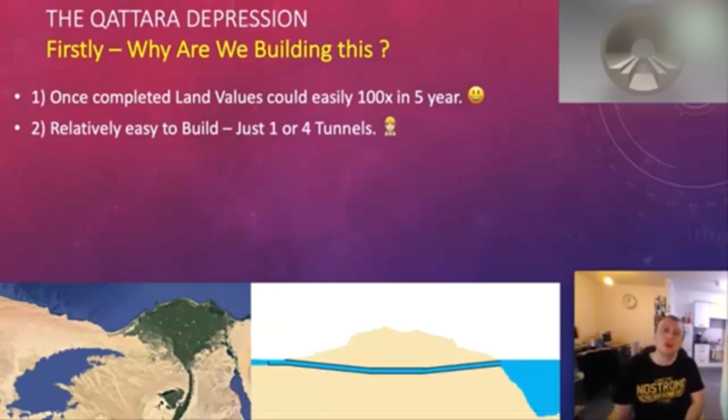Now, it'll be relatively easy to build this particular project. Like I say again, it can be done with 1 tunnel. If you do 1 tunnel, you wouldn't flood the entire area. There wouldn't be enough water volume coming through that tunnel. However, you could add subsequent tunnels at a later date, thus increasing the water level. You probably need maybe 2, maybe 3 tunnels, maybe 4 tunnels just to be safe. It's up to you how much you want to spend. It is highly probable, and I mean very, very highly probable, the Egyptian government would fund the entire project.

They've just spent an absolute shit ton of money on the Suez Canal. Why would they not spend a relatively small, affordable amount of money on this project if it increases the GDP of their country? They definitely get $10 back for every dollar they invest in this scheme, easily. It's very close to Europe, thus a potential tourist attraction.

Now, I've mentioned the Palm in Dubai. This could be a really excellent smart town or smart city. It could be a place where people could holiday. You could have hotels here, restaurants, bars. You could sell the property here to high net worth individuals. You could sell thousands and thousands of acres for development. It is an endless opportunity.

All you need to do is use your imagination, guys, and this is the perfect place to do it on this channel. So it will literally put Egypt on the map. The map of the world will change because this is such a huge area, 7,500 square miles of pristine lake, which could be used for a hell of a lot of different things, and that in turn will boost the local economy by a good few percentage points in the next couple of years.

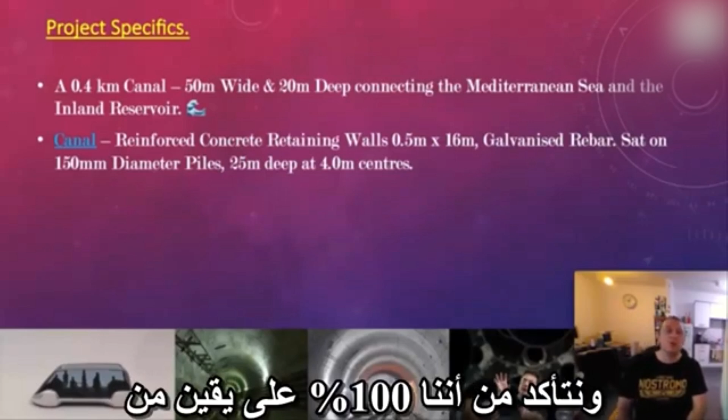The actual retaining wall will be sat on 150 millimeter diameter bored piles. They'll be steel piles, 25 meters deep at 4-meter centers. That is to ensure that this wall stays in place for the next 150 years and does not topple over if we do at some point need to widen the canal. Obviously there may be some extra works required if they do require widening the canal, but I don't think so. But just to be safe, let's put it in there and make sure we are 100% sure this is going to stand the test of time.

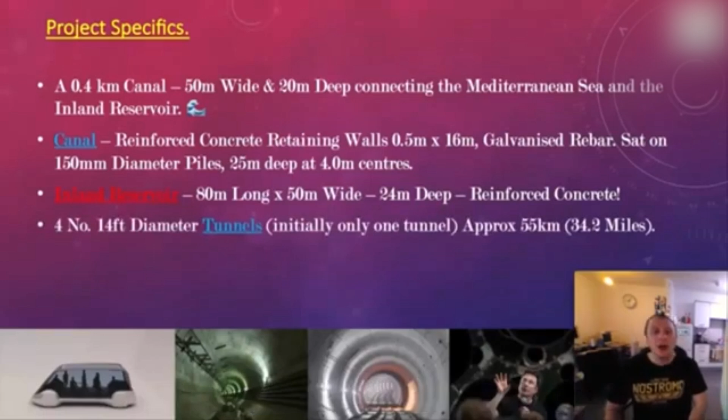So the inland reservoir will be 80 meters long by 50 meters wide by 24 meters deep. So it's very, very big, a lot bigger than an Olympic sized swimming pool. Again, reinforced concrete, galvanized steel rebar. This reservoir will be linked to 4 typical tunnels from the Boring Company, 14-foot diameter tunnels. Initially just the one. They will be approximately 55 kilometers long, or 34.2 miles.

In between the actual canal and the reservoir, we'll have 6 sluice gates. That ensures that we can undertake any maintenance we need to do on the tunnels or on the reservoir. Thus, we need sluice gates to control the flow of water.

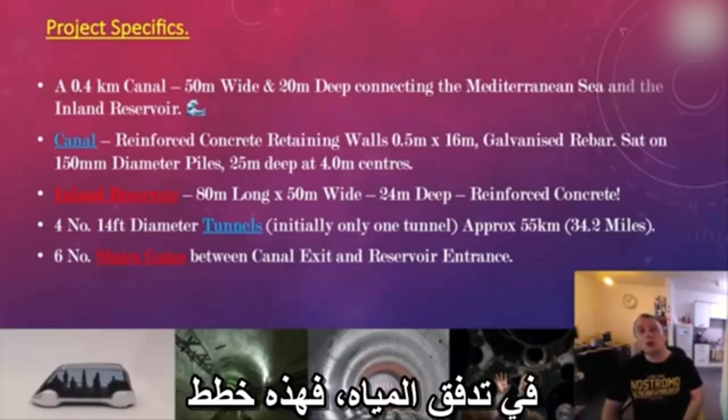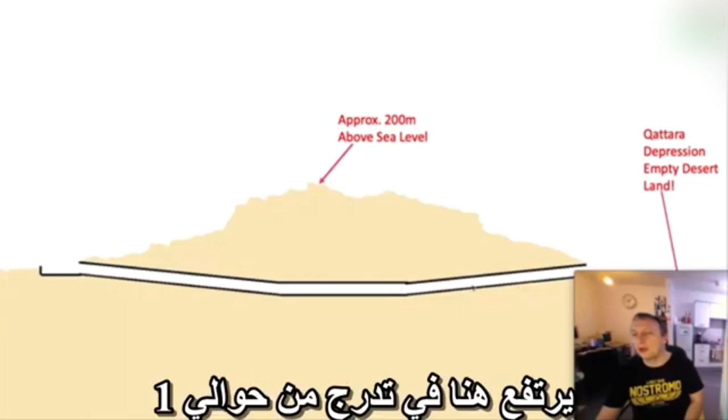Here's a diagram that I produced in advance. You can't actually see the depression, unfortunately, because my mug is in the way, but as you can see, we have our inland reservoir here. This is prior to flooding. We have our tunnel that heads down at a gradient of around 1 in 800. We have a flat section here, and then it goes up here at a gradient of around 1 in 300, and then the water comes out into our large depression here.

Here we go. Here's a look at what will happen when we eventually open those sluice gates and the water floods into our either tunnel or tunnels. It will fill up the Qattara Depression. Obviously, if sea level is here on this side of the, it's not really a mountain, but it's kind of a mountainous area. Let's call it a hill. So on this side of the hill, you've got your water, sea level here. It will match it on this side.

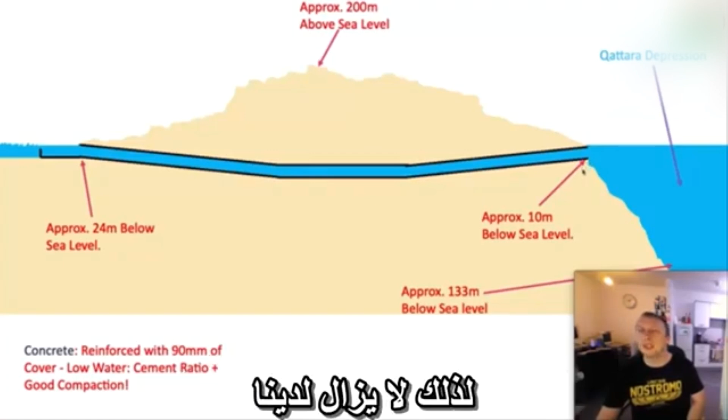Thus, it doesn't matter if the tunnel is heading downwards before eventually coming up. It will still fill up this inland lake. We've got approximately 24 meters below sea level at this point here near our reservoir. When it eventually emerges at the other side of the hill, it is 10 meters below sea level, so we're still going to have that water pressure from the sea pushing through here and filling up the reservoir. At its deepest point, 133 meters.

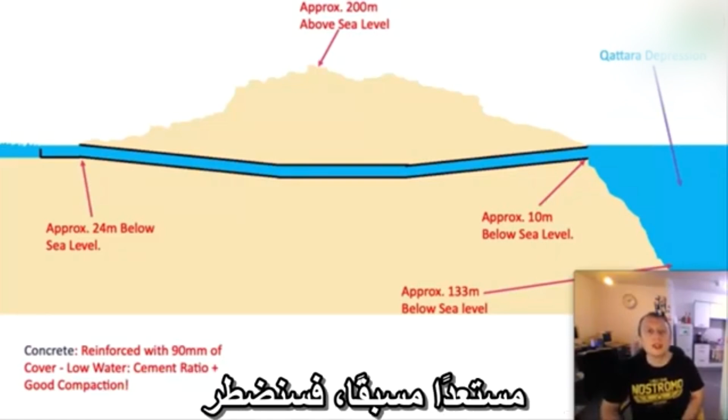Just to let you know about the concrete we're going to use, obviously this is sea water. Sea water does not work well with concrete if you don't prepare in advance. We're going to have at least 90 mil of cover on our reinforcement, otherwise seawater will get into the concrete, penetrate that rebar, and then cause corrosion, which will then break out the concrete. We want a low water to cement ratio, very low water to cement ratio if practical. We want very good compaction.

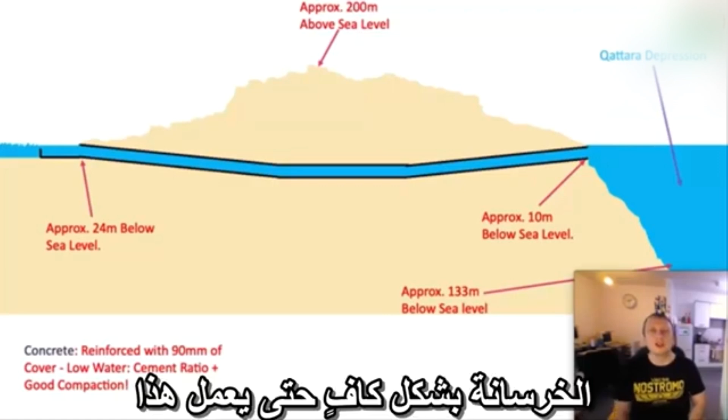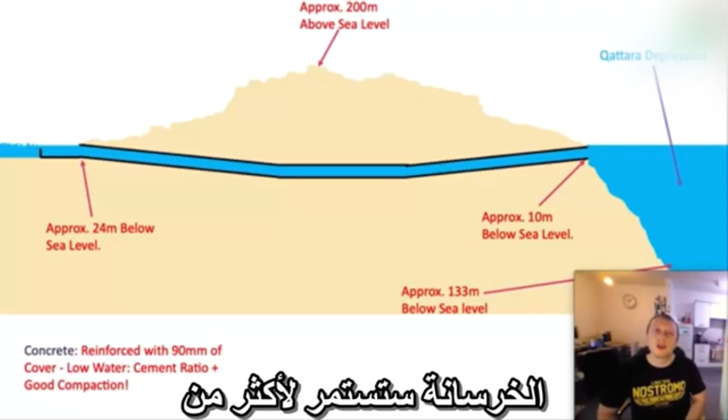We'd probably use some kind of plasticizer or additive to ensure that we could use low water, and that would allow us to compact the concrete sufficiently for this to work properly. If we compact it properly, that's going to prevent the sea water from penetrating the concrete. Thus, the concrete will last in excess of 100 years for this particular project. And the same goes for our concrete segments in the tunnel. They will need to be made to be fit for purpose.

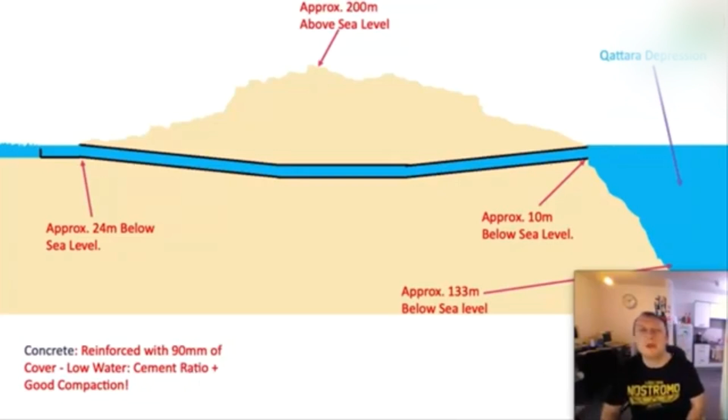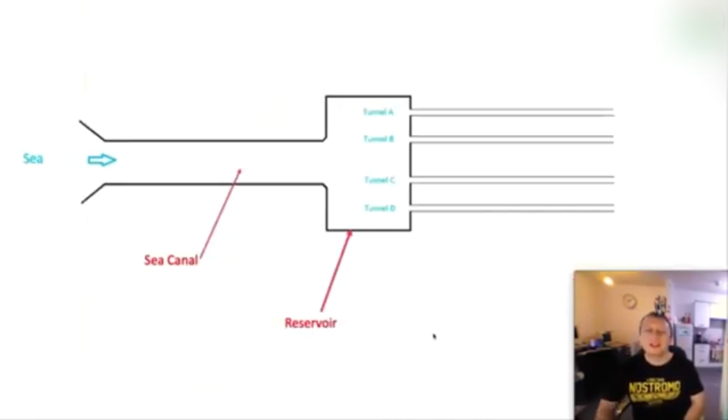So here is our, imagine we're in a drone and we're floating above the project near the Mediterranean Sea. As you can see here, we've got our sea canal, we have our inland reservoir, and then connecting that we have our tunnels. Initially we will maybe just go for tunnel B, but once the TBM has got to the other side of the hill, it will then come back and create tunnel C.

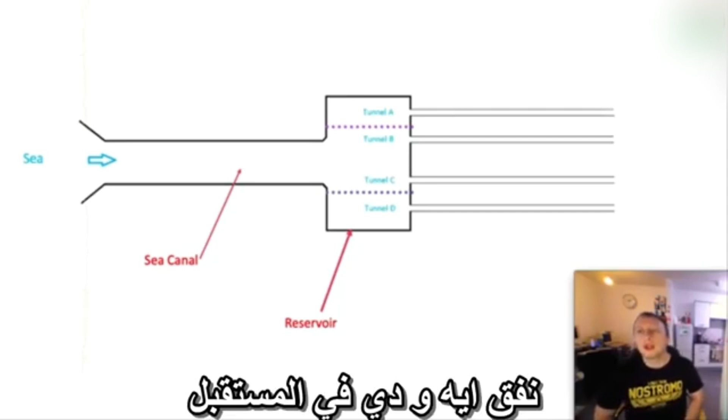To ensure that in the future we can construct tunnel A and tunnel D, we will have retaining walls here, and thus that will allow us to build tunnel A and tunnel D in the future without having to build some kind of very complicated dam inside here, or some kind of complicated tunnel that links under here. It's better to plan in advance and do it as such, so that it is relatively easy to construct.

Also remember, we've got our sluice gates, our 6 sluice gates. In the event of needing to do maintenance on any of these tunnels, they will be closed. If the flow needs to be controlled, we can either partly open them or close them entirely for small periods of time.

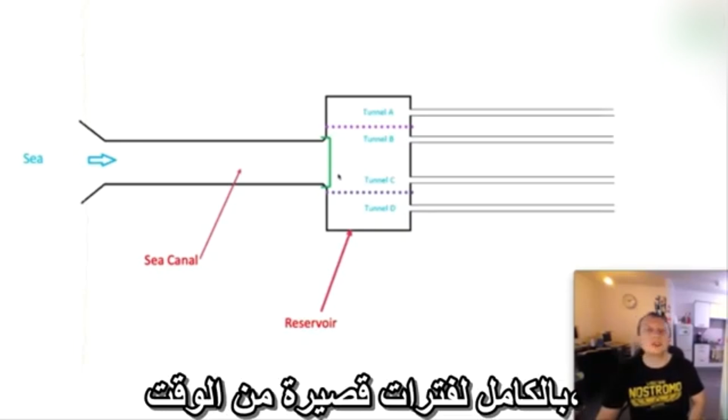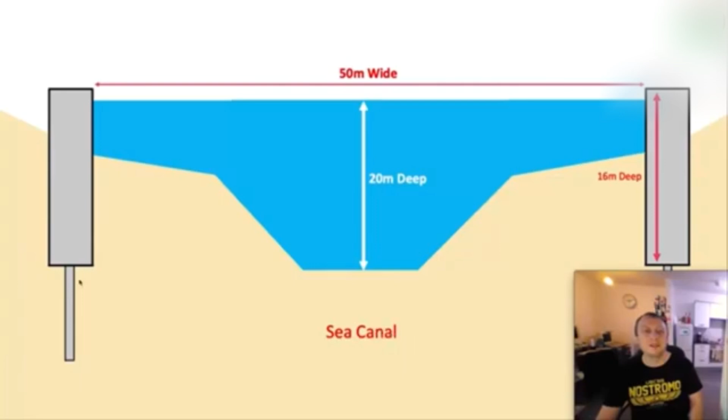In the future, it may be necessary to expand this canal to increase the amount of water that's going into the depression. We could just blast out this area here and this area here, no problem whatsoever. I thought at one point of using some buttresses here down the sides, but instead it makes more economic sense to use these piles. The retaining walls are 16 meters deep and 50 meters wide for the canal.

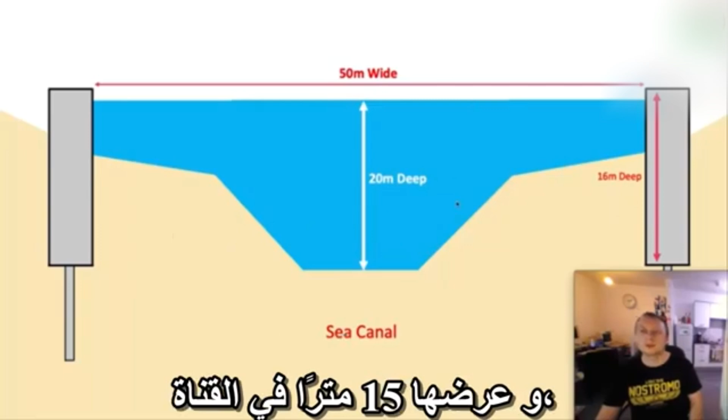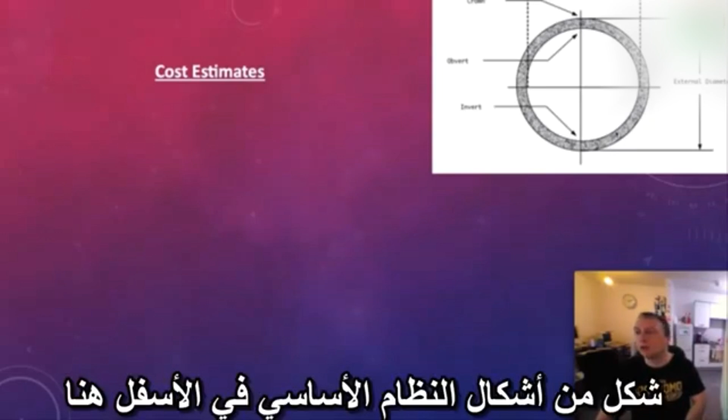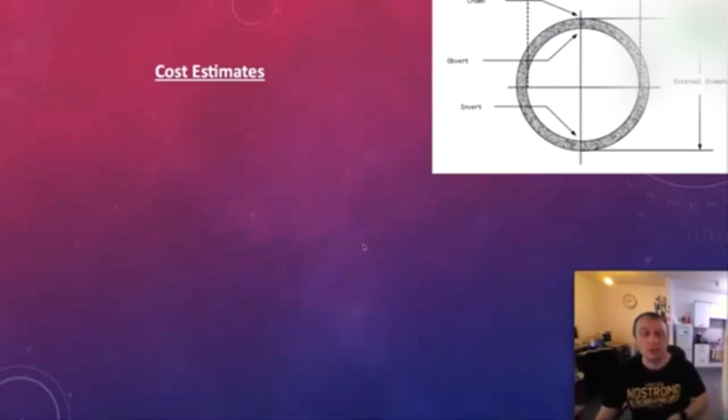A single 34.2 mile tunnel will cost $410 million. To do a dual tunnel, which I think we do need really, is going to cost $820 million. The actual canal, which is only 400 meters long, is going to cost 26 million.

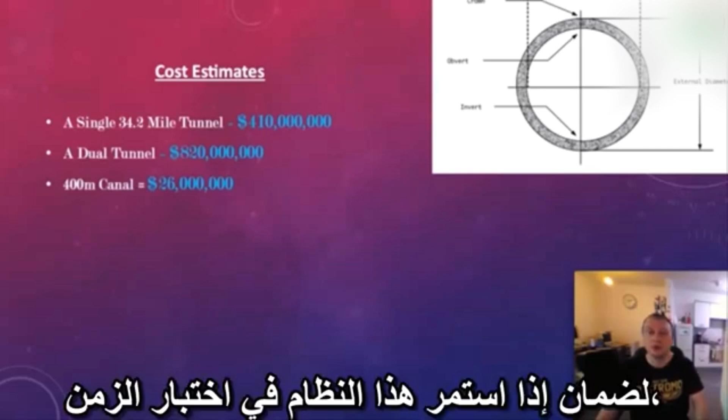Yes, I know guys, it's a lot, but it's a very wide canal. We're removing a lot of earth. There's a lot of groundworks to do. Those retaining walls are very thick to ensure that this system lasts the test of time and is structurally sound. Thus, it's going to cost around $26 million. That's a safe number. The sea reservoir and the sluice gates is going to cost around $11 million.

The pre-construction and other integral works, there's a lot of things we need to do. Set up our site offices. There will be access roads. There will be other pre-con works to do, surveys, understanding the geology of the particular area. That's going to add to that cost. So I've just put a nice round figure of 29 million in there, and obviously we're going to need to build a concrete batching plant as well for our retaining walls. So I've put that in there in that particular cost.

Overall, just for a single tunnel, which would be a good little starter to show that this actually works, would be $476 million. Or for a dual tunnel, $886 million, which is not too bad. That's around 620 million pounds, which in the grand scheme of things is not actually that much, is it guys?

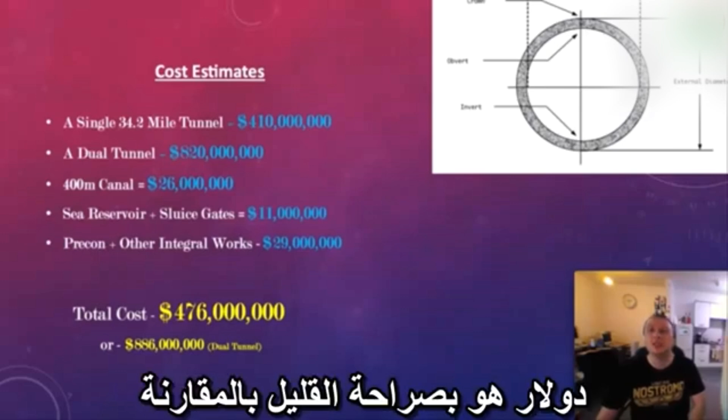Really, for what you're going to get for doing this particular project, spending $886 million is frankly peanuts compared to a lot of other projects that you look at in terms of California high-speed rail and High Speed 2 here. They are multi-billion dollar projects, so the fact this is under $1 billion is a good start. Conclusion: this is very financially viable considering Egypt recently spent $8.2 billion on extension of the Suez Canal.

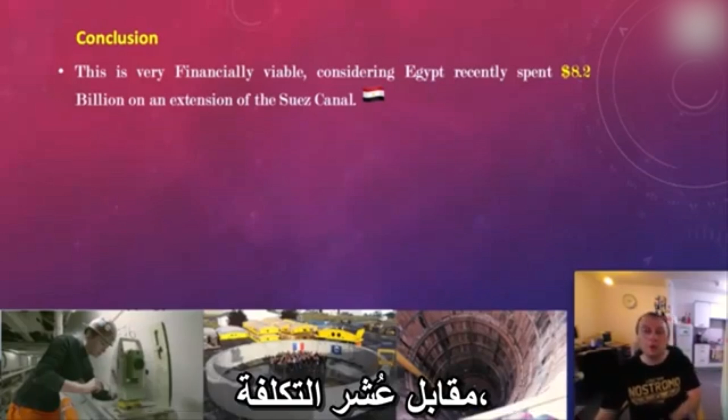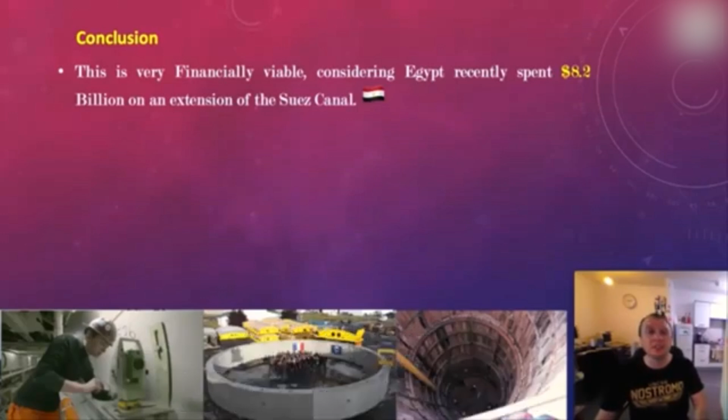So for 1/10 of the price, they could open up thousands of acres of land to residential development, or hotel development, or commercial development, all sorts of things. It opens up many possibilities just for $886 million. Just auctioning off the land around Lake Qattara, and I'm calling it Lake Qattara because I like that, will generate many hundreds of millions of dollars easily.

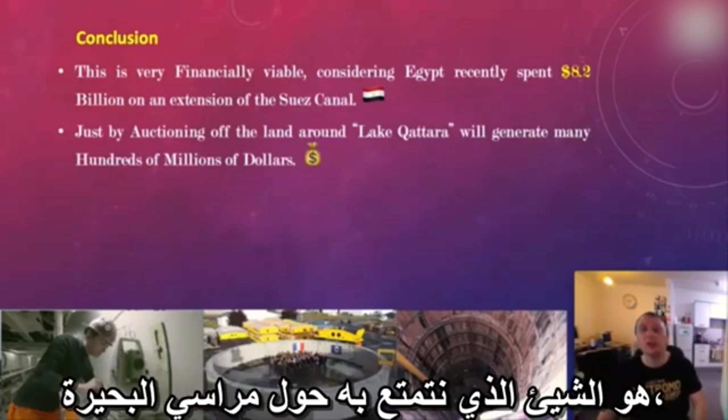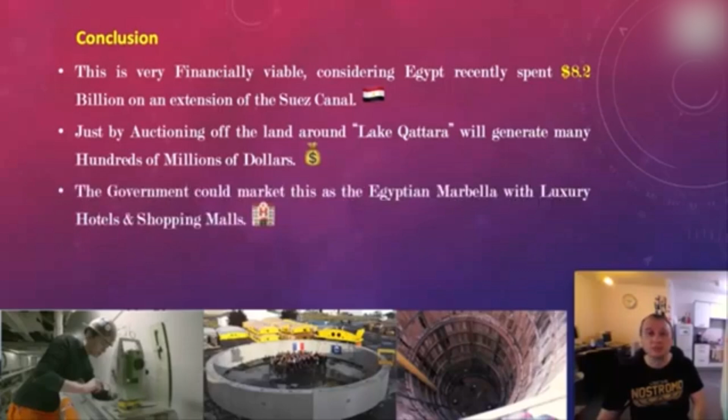Property developers will absolutely love snapping up that land. All the possibilities of building hotels, residential areas, marinas, that sort of thing around the lake is definitely worth the investment, even if they're paying, you know, $7, $8, $9, $10,000 per, say, acre easily. The government could market this as an Egyptian Marbella with luxury hotels and shopping malls. Obviously, Marbella is in Spain.

Typically, people in Marbella drive Ferraris, Bentleys, that sort of thing. They live in luxury apartments and buildings with swimming pools and garages and fancy things. It could easily turn this into the next Marbella, even bigger, with your own marina for your boat, somewhere to park your boat and use the actual lake itself. It would be perfect. You could have lots and lots of shopping malls and hotels in this area. It would be perfect.